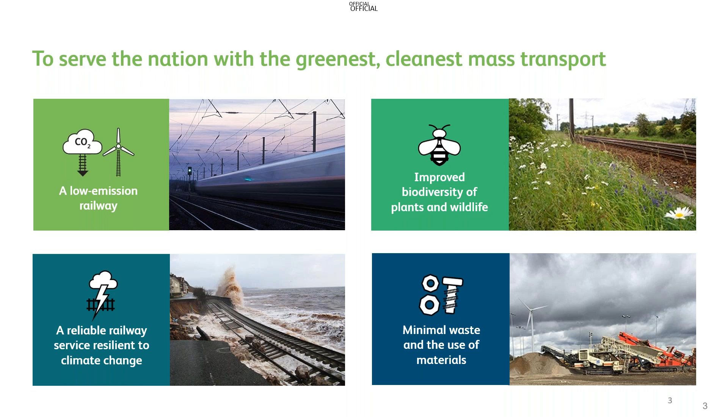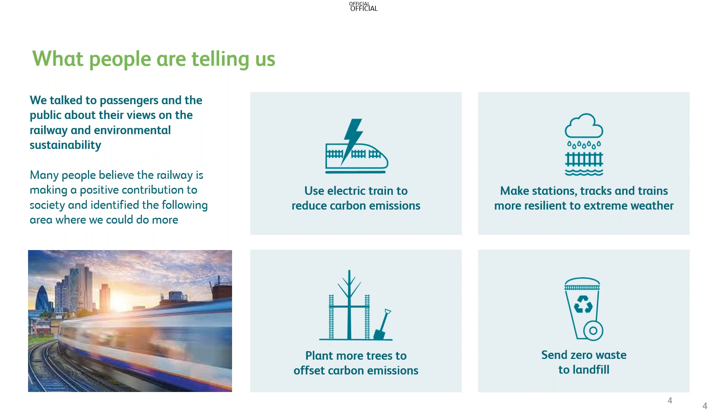So as part of our Putting Passengers First surveys and initiatives, we asked our passengers what they'd like to see, how they'd like to see Network Rail improve in sustainability and environmental issues. Suggestions of using electric trains to reduce carbon emission, make stations and tracks more resilient to extreme weathers, plant more trees - High Speed 2 is a good example of that. Where can we plant more trees and how can we offset that carbon emission? And also sending zero waste to landfill - how can we reuse, recycle and repurpose?

So a low emission railway. Let's explain how we look at this and how we're trying to sectorize and scope this type of work. It's divided into 3 scopes. Scope 1 is the actual direct emissions, so these are all sources owned by Network Rail. Any sources owned by train operating companies or freight operating companies are separate to this scope.

In scope 1, we're looking at the actual burning fuels and natural gases we use for heating and petrol and diesel in our cars. Scope 2 is the indirect emissions from electricity for heating and cooling that we buy. And scope 3, which is the largest of our footprint, is the indirect emissions for Network Rail within the assets - from supply chains and the infrastructure assets themselves. A lot of that is the embodied carbon that's introduced right from the start, right from the renewals.

In terms of carbon emissions and CO2 footprint, it refers to a collection of different harmful greenhouse gases. You've got your CO2, methane, nitrous oxide, hydrofluorocarbons, perfluorocarbons, and sulfur hexafluoride as well. So it's a mixture of those, but around 70 to 80% of it is around the methanes and the carbon dioxide.

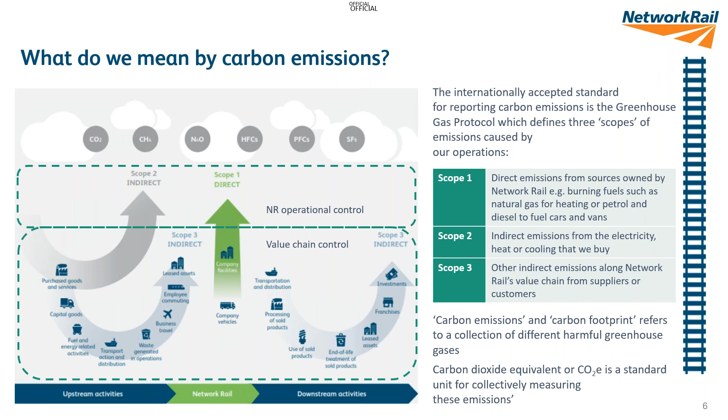And CO2 is a standard unit for collectively measuring these emissions - we normally say CO2e, so it's the equivalent. Looking at these scopes: scope 1 is 1% of our footprint, 51,000 tonnes of CO2. Scope 2 is very similar, 2% of our footprint. Now scope 3 is 7.8 million tonnes of CO2, so it's 97% of Network Rail's total footprint. So it's a large part of the scope for us to look at and to dissect.

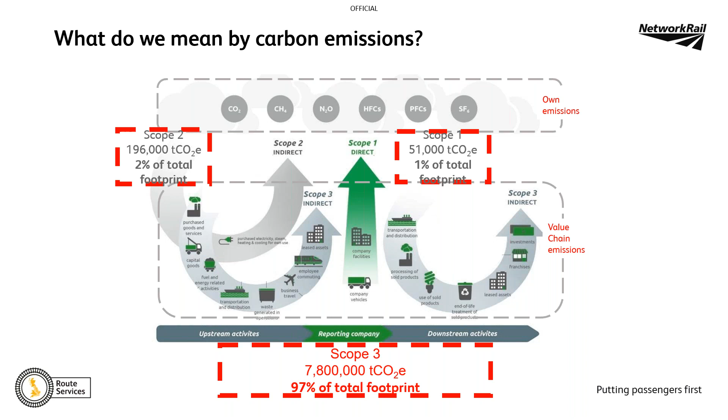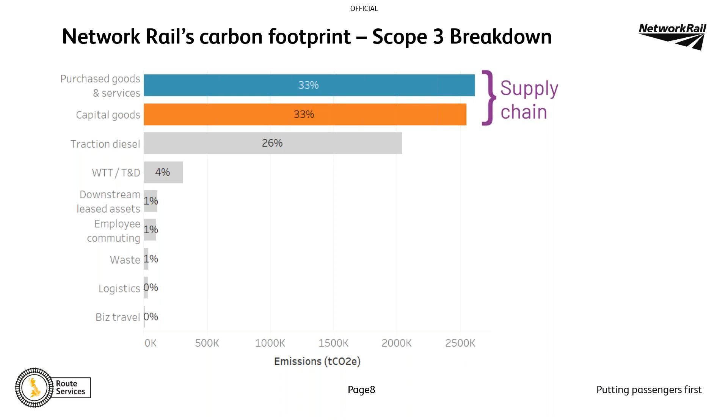So if we look into the scope 3 breakdown, we've got 33% purchased goods and services and capital goods - that's where our embodied carbon within a lot of our materials lies. Traction diesel, so diesel for our vehicles and plant that we operate - it doesn't include any traction or electric traction for trains within this scope. As you'll see later, most of that is going to come from nuclear sources, so it's seen as zero at the moment, and that's currently how it's been assessed. And right down to waste, logistics and business travel, which isn't happening very much at the moment.

Low emission railways. Our ambition is to achieve net zero carbon by 2050. It's 2045 for Scotland - I'm not sure why, but that's what's been agreed. And it's to deliver continual improvements for air quality to our passengers, neighbours and employees.

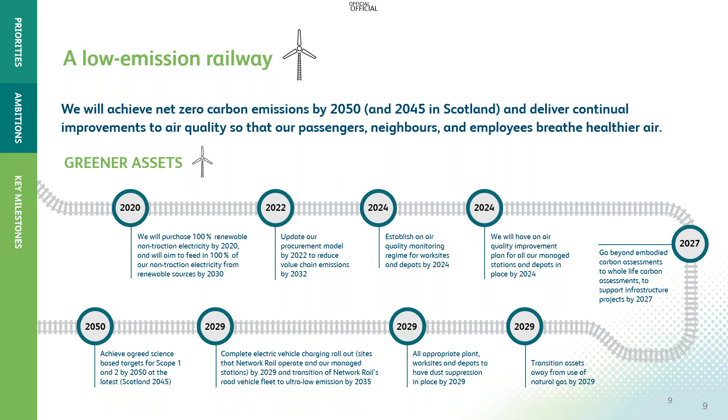So looking at that healthier air, what can we do on our roadmap and what are our key milestones? Purchasing renewable non-traction electricity, looking at nuclear sources and others. Updating our procurement model to reduce carbon within our supply chain. And establishing air quality monitoring for work sites and other areas.

Some of our quick wins: EV charging for our fleet, trials looking at electrical and rechargeable locomotives and some plant. Hydrogen and battery trains - we're going to start a trial in 2024 on those. Also looking at efficiencies within the timetable where we can get carbon efficiencies.

From a renewable energy purpose, REGOs is the way in which we look at where carbon originates from, because we have to be open about where renewable energy is generated and when it originates. So having a clear policy on that. We're also looking at further electrification - decisions will be made in 2029 for where else we can electrify. Traction decarbonisation has already started, and air quality management for 2024.

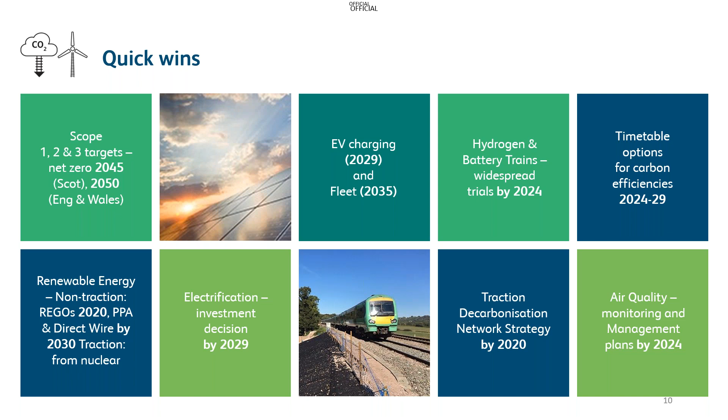Prior to 2024, we've already started looking at standards, how we can adopt certain reliable targets within our standards, looking at better mapping, conditions of embankments and track, and the whole track infrastructure as a system - looking at flooding, buckling, better monitoring of ambient and rail temperatures, and forming better, more accurate trigger levels where we see a problem may be coming.

So we're setting the asset policies for 2024 for standards, and the long-term climate change projections will continue from there. Reviewing criticality and vulnerability of our assets in 2024, and then agreeing a level of service in extreme weather conditions with government and regulators by 2027.

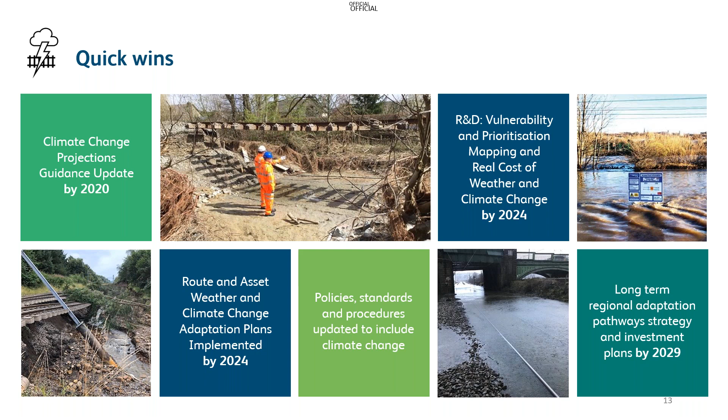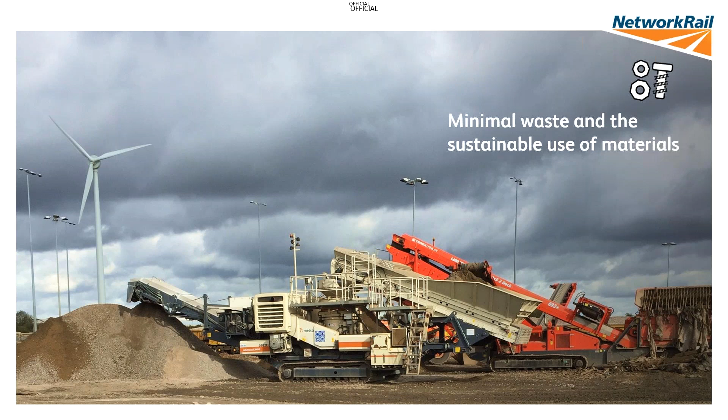So where we're leading with this presentation, really we're looking at the materials and how we can minimise waste and have a more sustainable material within track.

Currently our roadmap for minimising waste - we're prioritising materials and waste streams so we can see which ones are the hotspots, where the carbon hotspots fall, what's our most used and most unrecyclable material. We're then employing a circular economy policy. This needs to feed into our supply chain and also within our standards, so it becomes a new way of monitoring and ensuring we get products that are sustainable for the future.

So adapting standards in 2023, and by 2024 we hope to have the materials embedded within the track - most of those being installed by 2024. We're ramping up to that date in terms of what materials we want, what we need to approve, what is best for us in terms of performance, sustainability, function and reliability. And then we'll start to embed the circularity, so we can begin that circle of recycling and repurposing.

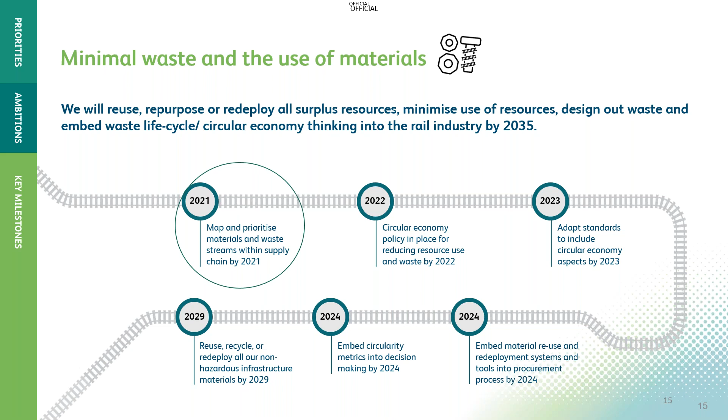Some of our quick wins: we've already approved some plastic sleepers to be installed, ahead of the softwood ban on creosote, which is in place from July 21. That's for our initiative where we have a composite sleeper that can replace softwood and hardwood, and later steel and concrete, once we approve it for higher category tracks.

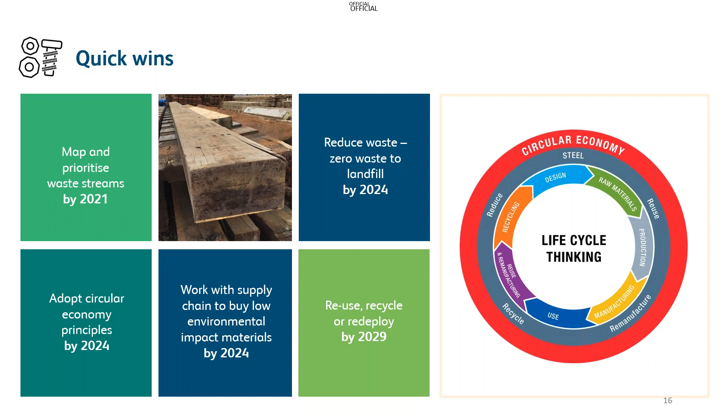Reducing waste, zero waste for landfill by 2024, that's the target. How are we going to get there? Can we look at certain products and materials within track renewals and track operations that can help reduce that landfill? Adopt circular economy principles, working with supply chains and reuse by 2029 to redeploy. So it's the circular economy where we need to start reusing, producing materials that are designed to be used within a circular economy rather than an end life where its final destination is unknown.

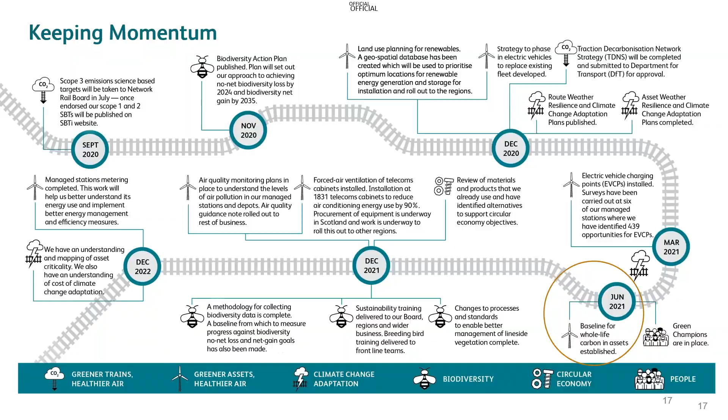So, track assets, track renewals. Most of you understand a track renewal and what's involved with it, the type of materials that's included.

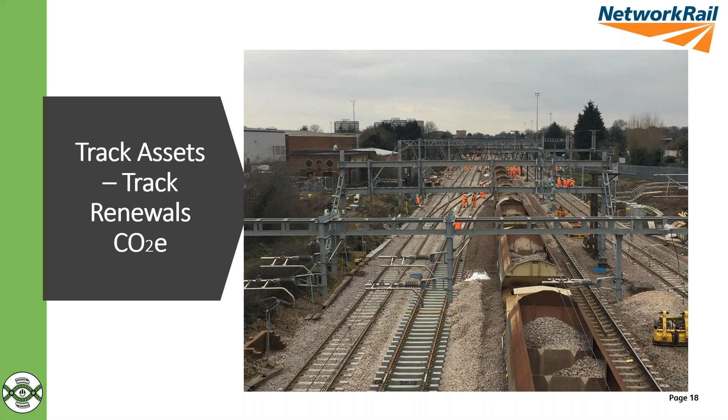Now, to help projects see how much carbon is being used in a renewal, RSSB and Atkins produced the rail carbon tool. This is an online tool used to calculate and analyse the carbon footprint for UK rail projects and activities. It's not just Network Rail using this, other infrastructure companies use it as well. It's a UK-based tool; similar ones are available in Europe, but most of those are provided by suppliers or other third-party platform providers. It enables you to select low carbon solutions and materials, with drop-down menus showing which types of materials have lower carbon, which type of plant, which type of activities, and so on.

It identifies and assesses alternative options, you can do the carbon footprint calculation, and also analyze the results from carbon models across different projects, so you can compare between the two. For us, this is a great model. It only looks at the snapshot when installed.

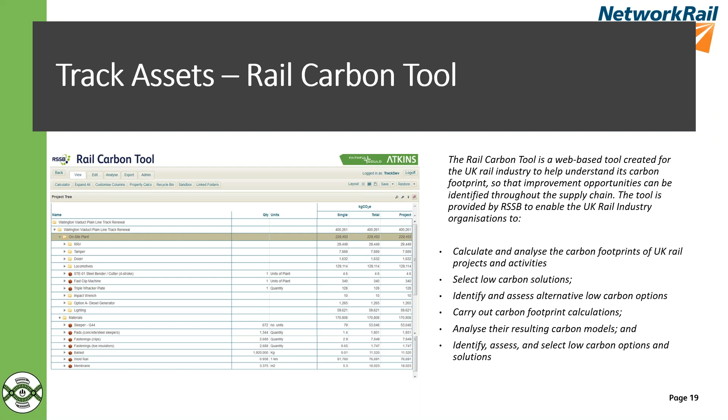You see on this example here, we've got sleepers, G44, pads, fastening, ballast, welded rail, membrane, so it goes down to that level. We've divided that down and done a bit of analysis, based on a typical 440 yard, 27-hour renewal, 400 meters. So 5% of the CO2 is within the ballast, 24% is within the concrete sleeper, so that's one of our top three. Then going down the list, there's small percentages of fastenings and clips, but they're not to be ignored.

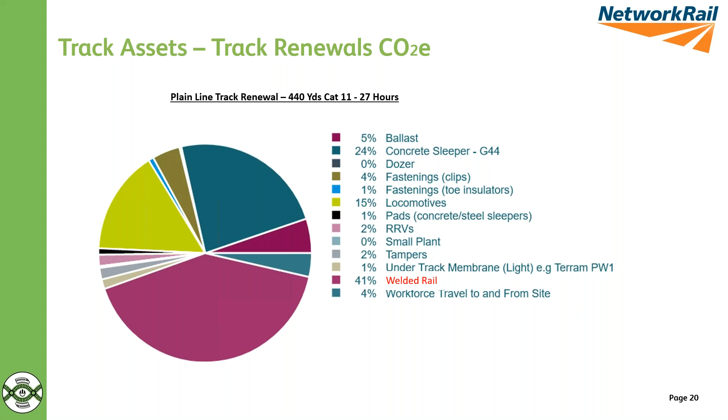Locomotives, I think that's our third highest. And then going down to the welded rail, which is 41%. That's supply of the rail to site, the install, the embodied rail, and with that comes the welding as well. So within the rail you've got the welding and you've got the stressing that's involved with it. Again, this is only for the installation, not for its whole life.

So what does that mean in context? How do we contextualize this? A track renewal, for 400 meters, has 207,000 kilograms of CO2. That's 103,000 trees. From the rail perspective, that's 204,000 miles driven in an average car. Concrete sleepers equate to 10 homes' electricity demand for a year, and for locomotives, over 4 million smartphones charged. So that gives you an idea of how much carbon we're using in relation to what we do most days.

And this is the track system we're looking at. We're not looking outside of the track bed, we're not looking at drainage, we're not looking at earthworks, not looking at any civils assets. It's just the track at the moment. We can step back from this and start to develop tools for drainage, for embankments, for earthworks, and for all of the other structures, so we get a better whole system perspective of what we're doing.

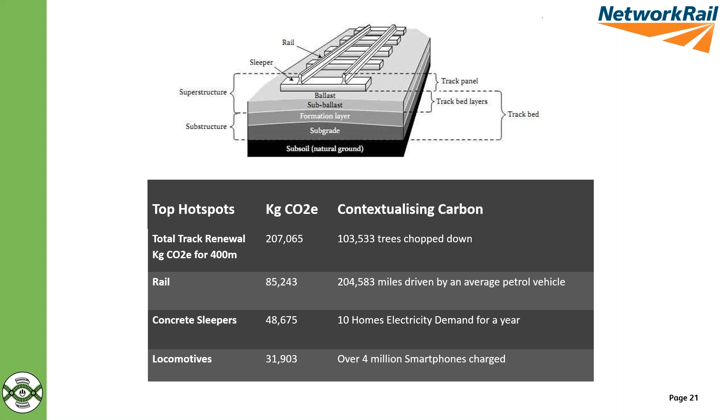So how can we drive those down? These are the top three, and 80% of that carbon used in track construction and track renewal is down to these three.

So rail: how can we use longer lasting, wear resistant grades? How can we employ those in areas where they're needed, where we get high rates of wear? We can then reduce CO2 by 50 to 80%, dependent on where they're positioned, and their life extension. Just by life extension of 3 or 4 times, in a whole life carbon assessment, you're going to have a reduction.

Manufacturer using electric arc furnace, so there's a reduction to be had there. Once again, that technology is used more commonly. Currently it's not, but it can be deployed. It's a case of when do we need it and is it actually required for the future? And I think the answer to that is yes, it is needed, and we need to start bringing that into use now.

We can monitor wear more precisely, so we can actually gain full usage of the rail rather than a sort of early or premature taking out of service. And then improving scrapping initiatives as well. We do recycle a lot of rail, but how can we do it better? How can we do it more efficiently?

24% of that rate is also within concrete sleepers, your standard G44 concrete sleeper. By using composite recyclable materials, we can reduce CO2 by half, using something that's also recyclable. Currently, concrete can be recycled, but it's very difficult - extracting the tendons, the stressing wires, and all the other parts. So it tends to get crushed and used as backfill, rather than repurposed into its original material, i.e. another sleeper.

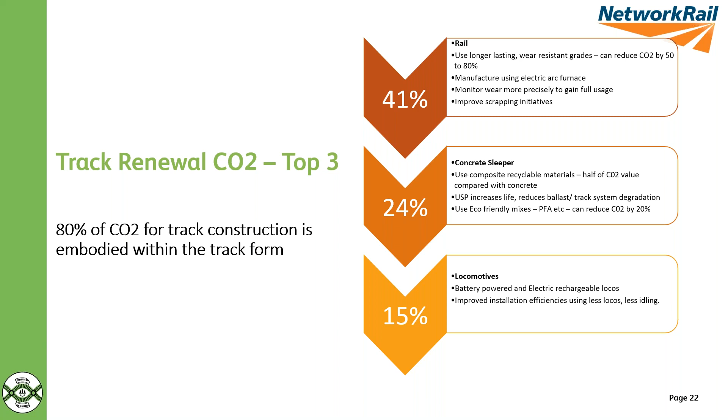So let's go into the rail and the sleepers. Looking at the rail initially, this is a wear model generated by voestalpine, to demonstrate how rail over its life wears and the cycles of grinding. So you've got the top left where RCF develops just after first installation. We then start the downward steps which are the grinding and milling activities. The natural wear is the downward slope, and at some point we reach that wear limit.

That's the end of life - in this case 20 years, as shown in the bottom table, when we then need to replace that rail. There's also the concerns over the actual superstructure, the track, and how the track is performing, because in some cases the life of the track is twice that of the rail. And then there's also the fatigue limits we need to look at. So when you look at the life cycle of rail, dependent on the rail grade, the radius, and the annual load - those are the parameters we need to assess, to then start to look at how much carbon is actually used.

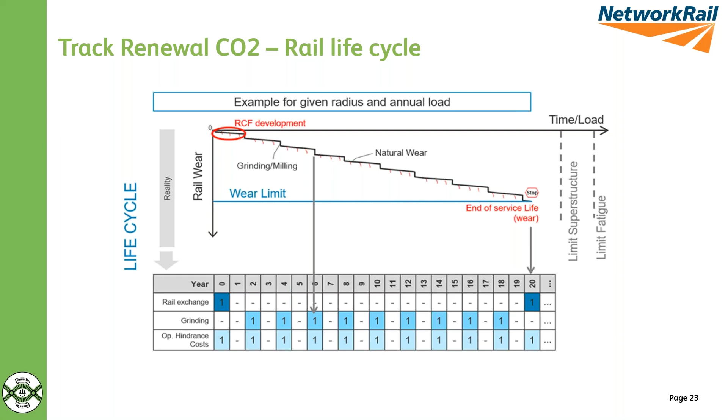Working within In2Track 2, this was presented by voestalpine - this is their life cycle cost model, both life cycle cost and life cycle carbon. In this example, they've mapped a section in southern Austria which shows the carbon hotspots. You'll see some small red sections, yellow, orange - as you can see, those are the tighter radiuses where we're going to need to change those rails more often. So more rail changes equals more carbon.

So they've looked at the length, the radius, and this is using 260 rail. This is the carbon model for that whole line as it stands at the moment, just in terms of rail - not the superstructure, not the sleepers, just the rail. By then looking at certain areas where they can use higher grade steels, such as R400HT, they can look at what savings they have.

So currently the emissions are 0.094 tons per metre CO2 over that 868 metre length.

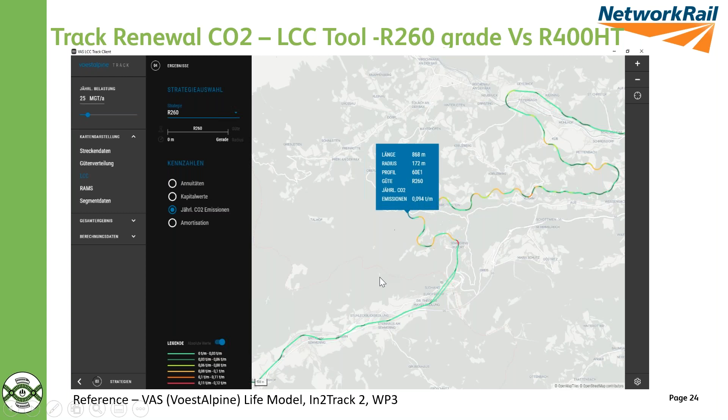Going on to the next slide, so this is using the R400HT, where that figure has dropped down to 0.018. So it's dropped from 9 to 2, basically. Now you can see the reds have gone, the greens have appeared.

So using it on those certain sections that have the red and the amber sections, which is probably only about 15, or probably less than 10% of their infrastructure has got those curves in there. But by using a higher grade steel, they've dropped the carbon.

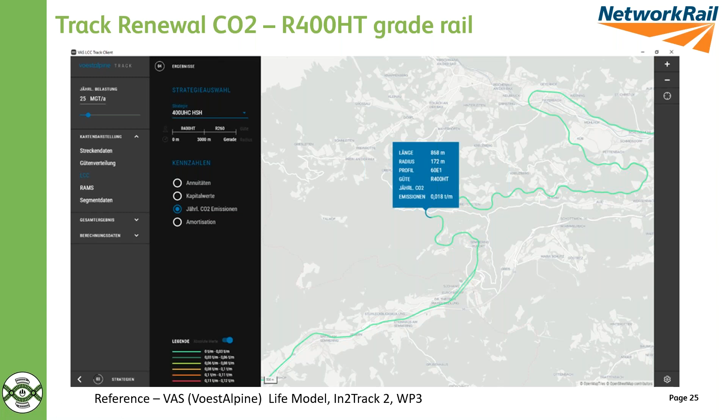Here's the table that just goes through some of that data. So that's the viaduct, that's the area where it was actually installed. So 25 million gross tons, length 868 meters and radius 172.

It's 60 rail. So with R260 standard grade, they're predicting a life cycle of 3.4 years. With 400HT, they're predicting 18 years. So that's a 529% improvement in life.

The cost savings go from 66 euros per metre down to 16 euros per metre, and CO2 rates go from 94 down to 18, so that's an 81% reduction. And that's by just deploying the higher grade steel and the extended life.

Now, the steel itself doesn't actually use more carbon to manufacture. If it does, it's very, very small and insignificant in terms of these figures. It's more about life extension.

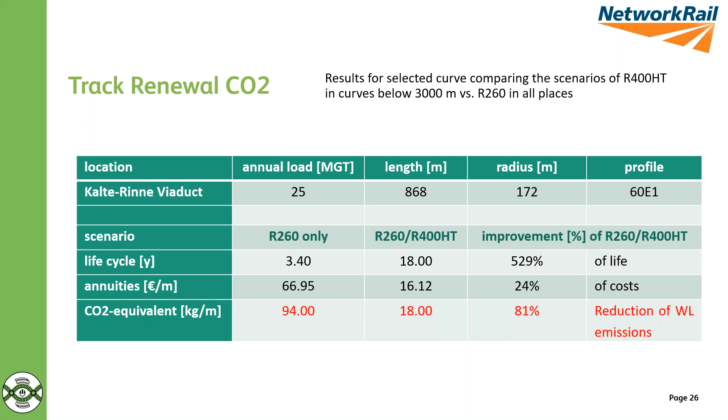So this is just a forecast, hopefully that will give us some reduction in steel production, which we can then see in rail. So if we start to look at lower carbon in rail, higher usage, better premium steels, better understanding on wear and wear modelling, then we should be able to reduce that CO2 further.

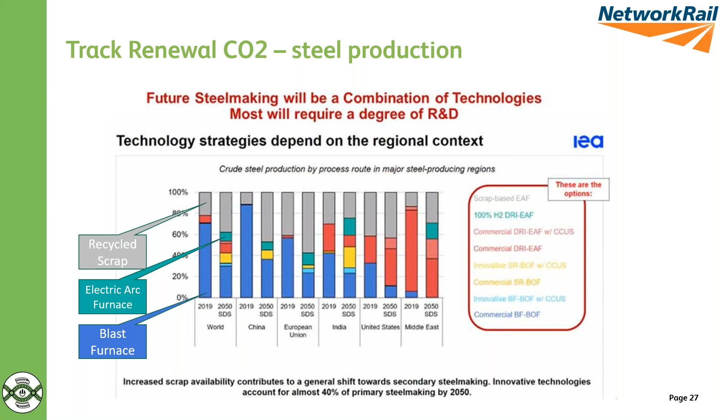Sleepers. Okay, so I don't know if any of you guys saw last week on the news, there was a new green sleeper introduced in Belgium. So this has 40% less CO2 than a regular sleeper and uses sulfur in place of cement, and it's fully recyclable, so it can go back into the reuse system as well.

So this is on trial in Belgium, so I don't think it has gained full acceptance yet, but it's something for us to look out for in the future. We need to understand the costs and performance and so on, but it's certainly a step in the right direction.

Network Rail's actions and where we're going with this. This is the composite sleeper. They've been produced for around 15-20 years. We've had them in the UK, I think, since around 2015 or 14.

First installed on London Underground as sleepers and S&C bearers. Soon to be installed on DLR and now installed on King's Cross. So first installation for Network Rail happened in March. It's being handed back, I believe, in April.

And this particular use for King's Cross Gasworks Tunnel, the issue was that using hardwood, we'd need to chamfer the end and shorten the end due to the tunnel invert. So by using the plastic, we can guarantee a better performance from that, as well as all the other improvements from CO2 and sustainability and so on.

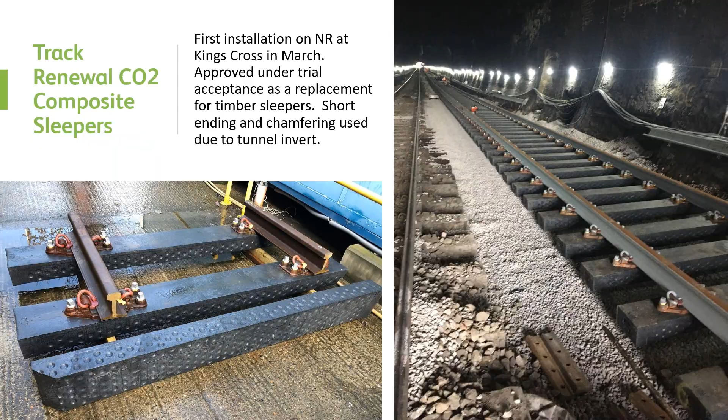So it's approved under trial. We're then looking at approving for higher category tracks. So this is sort of up to category 3 at the moment. But for higher category tracks for 2 and above, and replacements for concrete and steel sleepers, that's our next step within technical authority. So if we were to use composite sleepers, this is just a projected saving in CO2 over

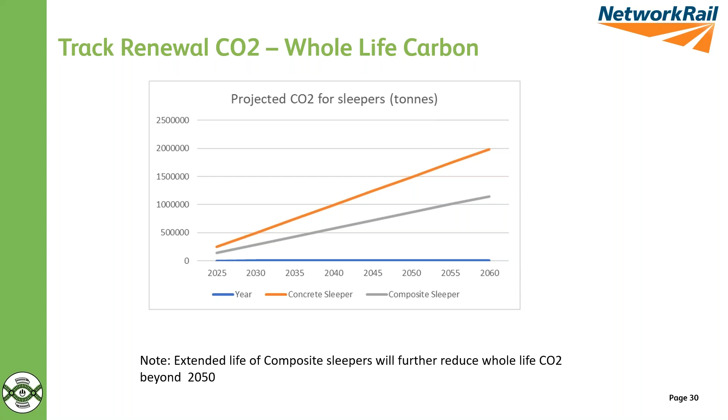That's based on, we currently use 700,000 sleepers a year, somewhere around that 600 to 700,000 in Network Rail.

Why don't we recycle insulators, clips, pads, nylons, all those other things that we tend to throw away, throw in the ballast and get forgotten? So I thought this is definitely worth looking into - how much does it cost us every year, and what are the savings?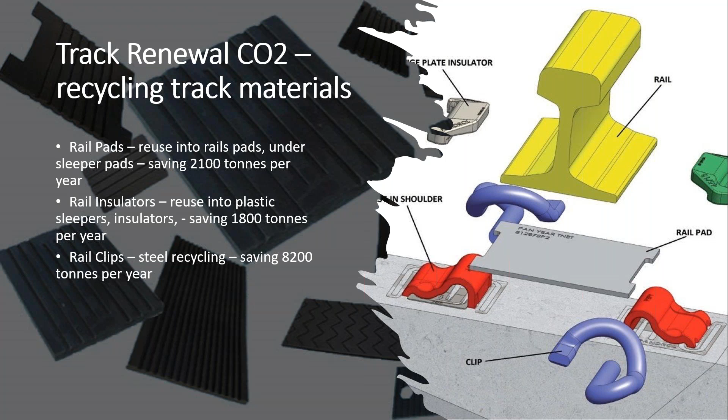So you've 2,100 tonnes per year on the rail pads, 1,800 tonnes per year on rail insulators, and 8,200 on rail clips for the steel. There's quite a lot of carbon there that we're wasting and throwing away. Most of the time you throw it back in the ballast, it gets dug up and scrapped somewhere, but it's not getting that reuse. So it's worth considering.

Now going on to some of the work we did with DLR and TfL, looking at sustainability and environmental impacts. We did a quick study with the supplier on hardwood sleepers versus concrete sleepers and Sicut composite sleepers. For Beckton Depot, they were looking for a sleeper alternative, something where the cost difference wasn't too large, but also looking at sustainability in terms of how long it can stay in there, the expected life, and embodied CO2.

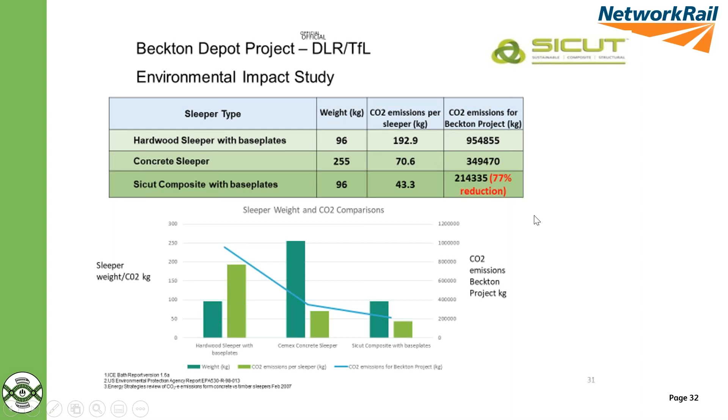In doing a lot of this work, we've realised that to do a correct and accurate assessment, we need a life cycle assessment tool. The increased awareness of environmental protection and making sure we are building for the future has caused us to need this. It will help us identify opportunities to improve environmental performance of the products, and inform decisions within the industry, within government, within organisations, within suppliers. Anyone involved within that chain should be involved with this and has a part to play.

We can then select the relevant materials, and also have a way of measuring it, so validating. Also in terms of marketing, implementing an eco-labelling scheme, so you can say that if your product is more eco-friendly than another, what's the metric for that, and how can we have a comparative metric? If companies are making an environmental claim, are we all making that claim on the same basis, using the same data and the same baseline?

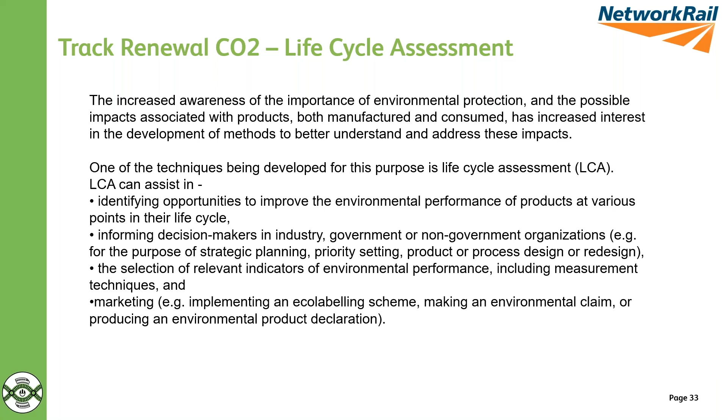So for Network Rail, we decided to look at, within a track whole life or life cycle assessment, what activities are involved within plain line track - this is for plain line track, not for S&C. We broke down the activities of tamping, grinding, milling, re-railing, re-padding, re-keying, re-sleepering.

Some remediation works for wet beds - re-sleepering is only needed where you need to re-sleeper in some sections, it's a small activity in most plain line track sections. Ballast cleaning, either as a life extension, because it could be just the ballast in the end that is the actual factor in the residual life that needs to be replaced.

And then there's rail defects, re-stressing, inspection, basic visual inspection. You wouldn't think it's a great amount of CO2, but we have guys walking out there doing lots of inspections currently, manually and visually, which, using vehicles and the whole fleet, does start to add up. And then there's the TRV and lubrication and so on.

So what is its usage? What effect does it have? And how can we accurately determine the cycles of those activities within the life cycle? For example, grinding - how many times do we actually grind rail in its life cycle? We currently base it on tonnage.

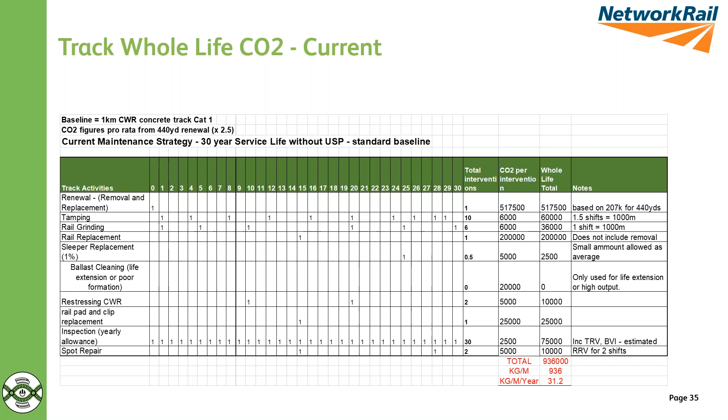So we look into the future and say, okay, what can we do? We can increase from 30 to 50 because we're getting better products now. We can have sleepers that last longer, track systems, we can maintain it better. We've got better degradation tools. Some of the things such as tamping, we may be able to reduce. Certainly with under sleeper pads, we know we can reduce tamping, and with certain materials the tamping frequency is less.

But in terms of the initial carbon from the track renewal, that's where the embodied carbon from materials lies - the rail, the sleeper, the locomotives, and all of the plant used. So we can reduce that, and we've done a reduction there of around 20%, but we know we can go better than 20%.

This is just an indicative figure at the moment, just to see where we can get to, so we can start to plan goals, plan where we need to be. So we have a glide path to get there. This could be 5 years time, where we have a 20% reduction in CO2, but we also have an increase in asset life and a decrease in some of those activities.

So if you look down the bottom left, this is what it includes: composite sleepers, low CO2 steel, longer life, extended life of the overall track system, autonomous inspections, a saving on the BVI, battery locos as well. So that brings us down to 16.1 - that's gone down from 31.2 to 16.1, so we reduced it by half.

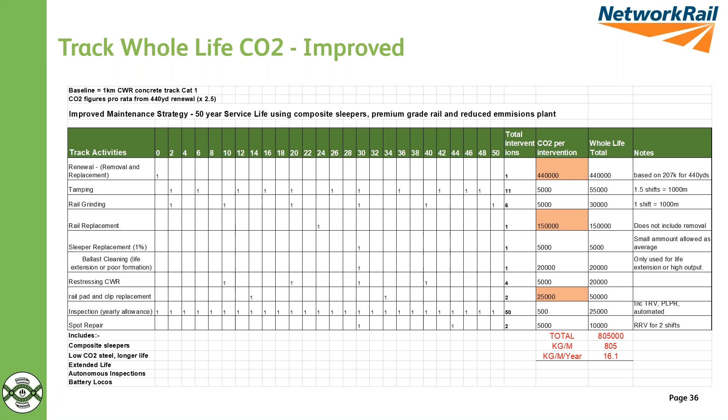In terms of those improvements between a 30-year and 50-year life, you can see the renewal for 30 years in blue dropping down - this is CO2 per year, kilograms per year, not the overall. So you can see where most of those improvements come from: rail exchange, the actual track renewal, inspections dropping down quite heavily as well. So it just shows you where your big wins are.

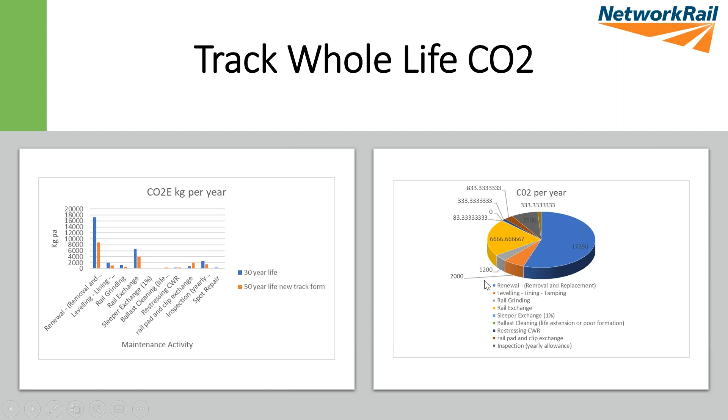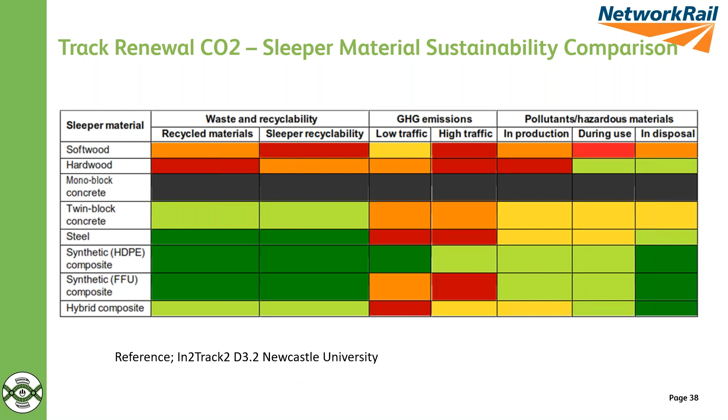Now, in terms of having a material that we can repurpose, how does that help us? Well, repurposing into a life where it can actually be buried in the ground for 60 years and used - buried meaning a sleeper - and being used for 60 to 70 years and then being repurposed. For us, that's a circular economy plus. That's actually a higher level than what we currently do.

At the moment, our circular economy involves plastic bottles that go round in a circle, and you're probably talking about every 6 to 8 or 9 months that bottle comes back around again. It gets used, it gets recycled, it gets repurposed and sent around. Eventually, the material itself degrades because you don't have the actual material strength to produce what's required.

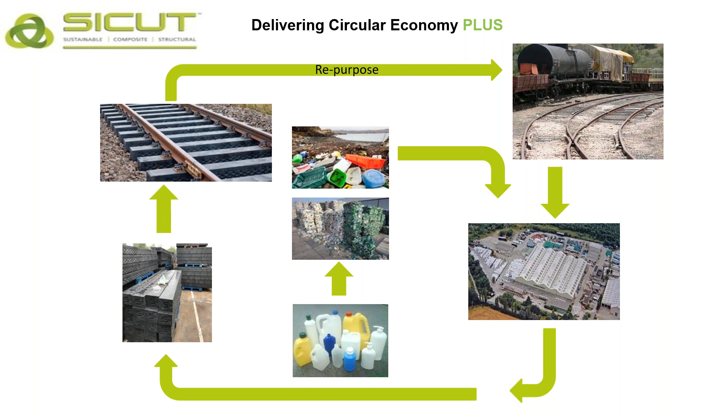But whereas with some products, the recyclability is direct and it can last 3, 4, 5, 6, 7, 8 times more, especially if it's being used for 50 to 70 years as well. So you can see that could be repurposed and reused for 300 to 400 years, whereas plastic bottles probably have a shelf life of 2 or 3 years.

And in terms of saving hardwood, 2.5 acres make up a mile of track. Average hardwood is 15 to 20 years in track life. Most of those now probably 10. We're getting a lot greener. They should be grown to a 100-year life, but we're chopping them down a lot greener now.

And in terms of plastic, 1 mile of sleepers equals 170 tons of waste removed from the environment. So it's out of the oceans, locked away for 50 years.

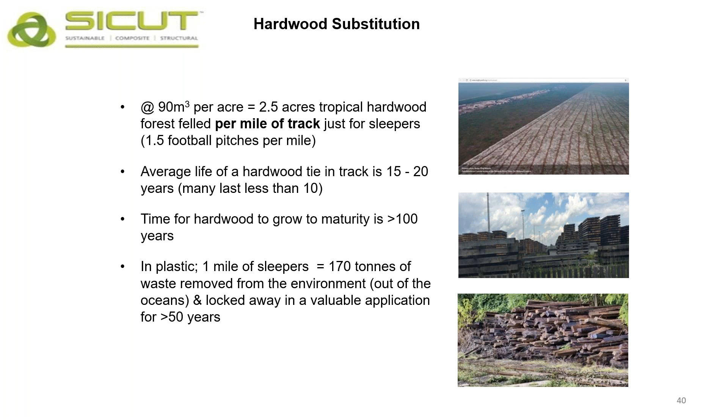So concrete. Concrete - the statement at the bottom there is nearly 8% of the world's greenhouse gases is caused by OPC cement. And if concrete was a country, it would be the 3rd largest in the world. There's another statement that cement has transformed the world, but now threatens to wreck the environment. So I think concrete still has a part to play within our construction.

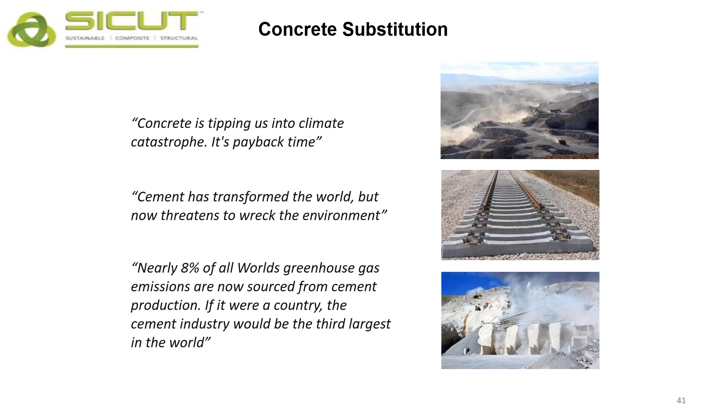We've seen the green concrete sleepers. We've been speaking to our concrete manufacturers, and they have ways of reducing CO2. So it's not the end for concrete. We know as an industry across the world, globally it is an issue, but for sleeper manufacturing there are ways around it. So I think it's more a case of having to make the suppliers adopt this awareness of greener materials, and that products for the future need to include that.

There is an EN standard on environmental management, the EN and ISO standard 14040, and this is where the life cycle for carbon emissions exists. So it takes you through from product all the way back round to end of life. So it looks at each one of those areas, and it provides a standard approach for calculating CO2, calculating emissions within the life cycle, for recyclability, for repurposing, reuse. So by following that standard, everyone can then use the same approach and same methodology for calculating it.

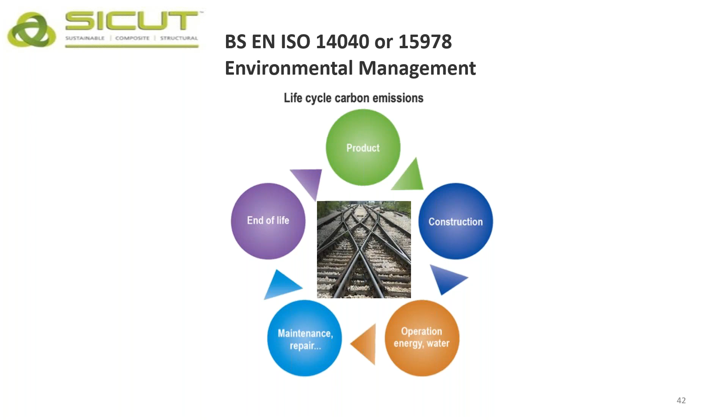So on my closing thoughts, what do we need to do next? Us as an organisation, as an institution, and various people within those organisations, how can we all improve these things?

I think we need to improve sustainability awareness, certainly within track materials, operations, and whole life, within the designers, those that specify materials, and end users. A lot of it is based on whole life cost rather than other issues, and cost comes into it quite a lot. If it's initial unit rate cost versus whole life cost, it becomes difficult for people to adapt and use more expensive materials.